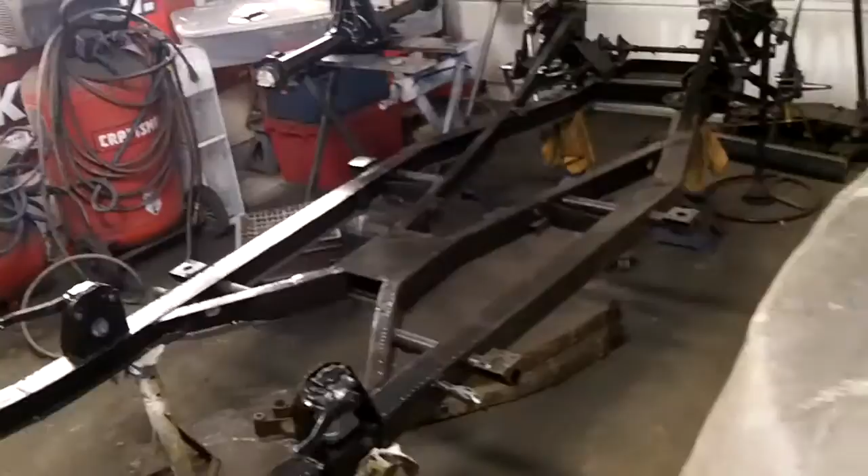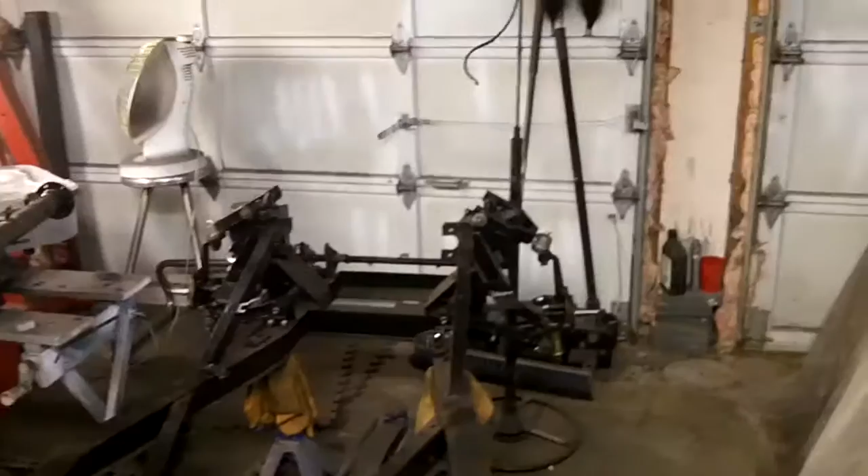As you can see, we got the chassis uncovered again. It's very dusty. I've already dusted off the back end as best I could, but the front end needs a lot of work. That's what happens when you're in a closed environment over the winter with no doors open, so it gets pretty dusty in here. Anyway, we'll clean her up as best we can. It certainly doesn't look like it's been freshly painted anymore, but that's okay.

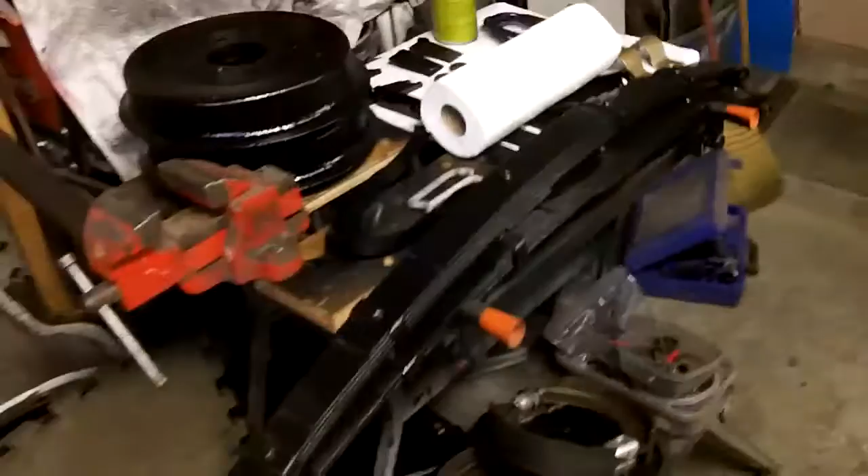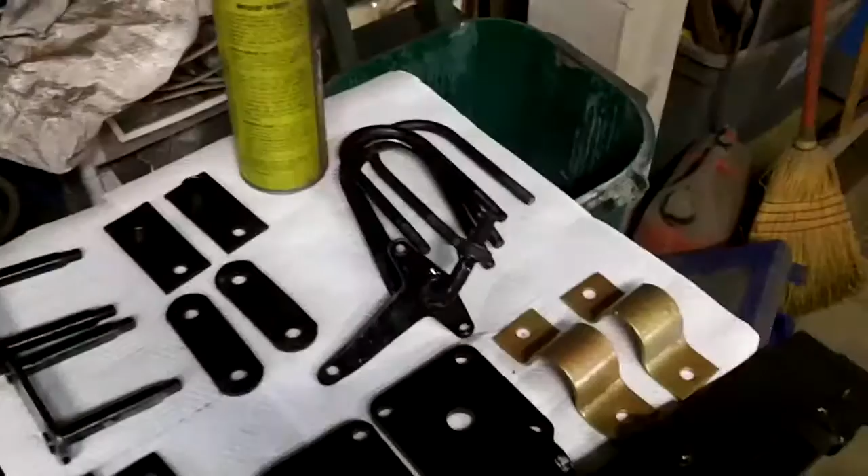We're going to attempt to reassemble the rear of the car today. We'll try to get as far as we can. I have all of the freshly cleaned components over here, representing more than a couple weeks of work. All those bits are clean, the springs are ready to go, brake back plates are ready to go, diff cover is ready to go. I've got the rear axle ready to go too. I think we're in pretty good shape to start reassembling, and we'll probably get to it shortly.

I've dug my manuals out, and I think what I'm going to do is go through a really brief intro on these manuals and how I use them in the restoration of this car. I did something similar when I had the TR6 out, showing all the manuals I had for that and what was important to have. I'll show you a quick overview of what I've got here working out in the garage. Alright guys, see you in a bit.

Alright guys, quick overview of what I'm using as far as manuals out in the garage to reassemble this car. The first manual I have is the service instruction manual from Standard Triumph. This is the third edition, one of the original books. It says for Triumph TR2, but it's actually got a supplement for TR3 in the back of the manual. I do have a newer printed copy of this same edition, third edition, 6th printing, but obviously that one's a lot newer, not being hardcover, and being a more modern publication.

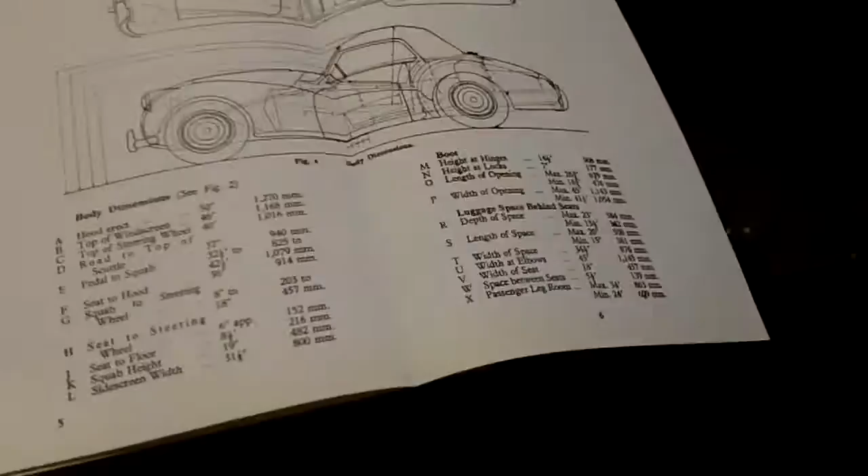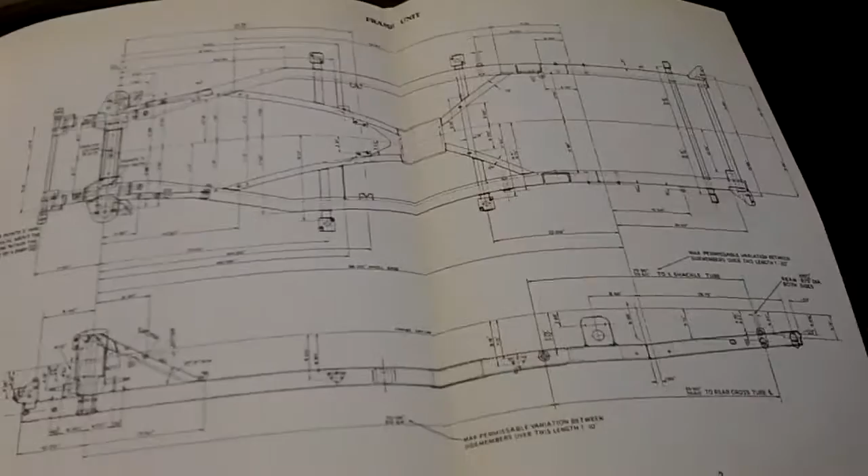The cool thing about the older books, and I actually have a mint condition one that doesn't make it out to the garage, is they've got these really cool flip-out pages in here. Here's the general data page, for example. I'm not sure how well you'll be able to see this, but those are kind of cool. I really enjoy these, and I was actually thinking of framing a couple of the ones out of the mint condition book, because I think they're pretty cool. Here's another one on the frame unit, with pretty detailed information to check your frame. I thought those would be kind of cool framed.

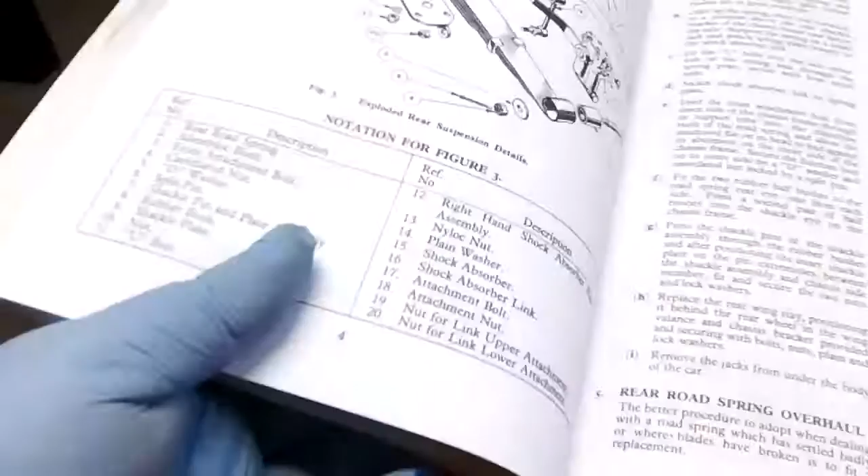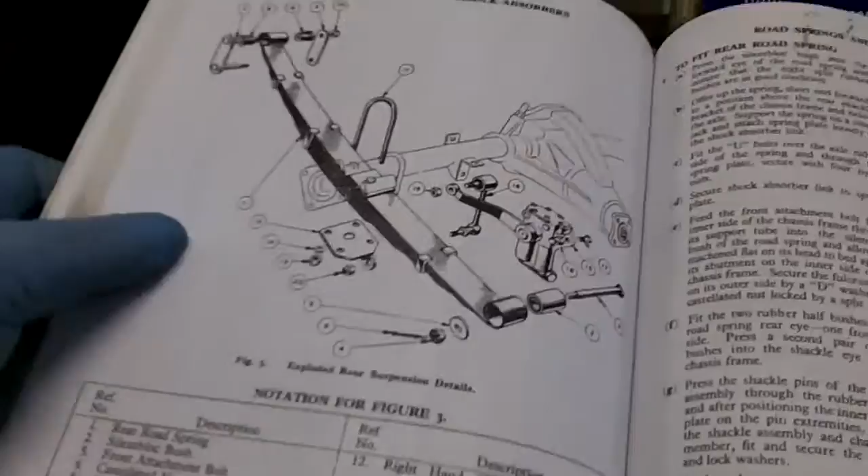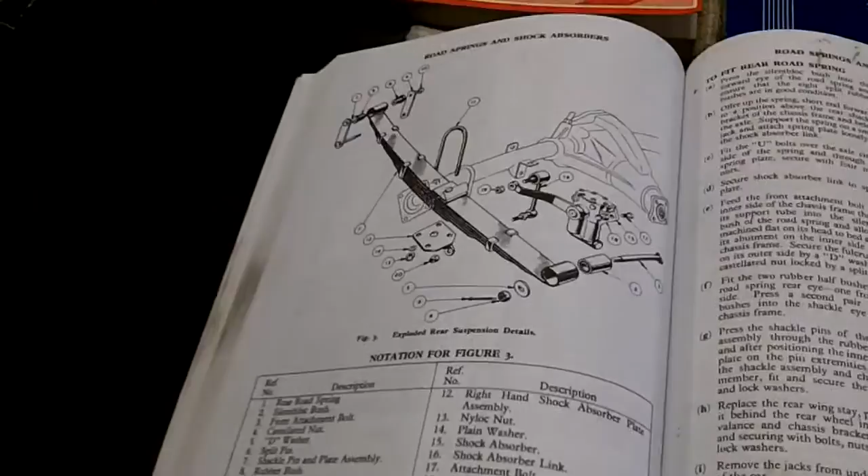So this is a good book that covers pretty much everything you need to know about working on a Triumph TR2 to TR3B. There are some minor changes along the way, but this will cover most things you'll come across. I've just got this page open to the road springs and shock absorbers, because that's the part I'm going to be working on today. I wanted to give you a general overview of what these books look like and how descriptive they are. These books make this car extremely easy to work on, especially with the availability of parts. The parts availability for these cars is phenomenal, you can almost get every single nut and bolt, with very few exceptions that are NLA. So I use that book basically to figure out what to do on this car.

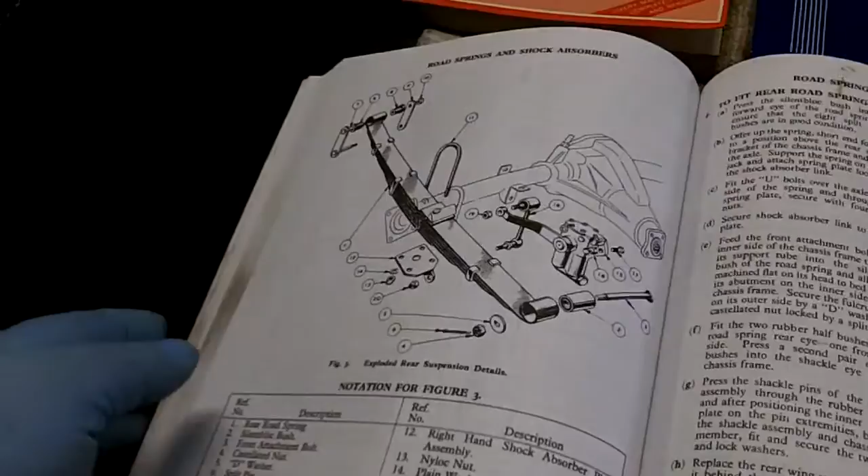I also use the Haynes manual. If the language in the Standard Triumph book gets a little over the top, sometimes it's difficult to understand the British terminology, and the Haynes manual can help you out in that regard.

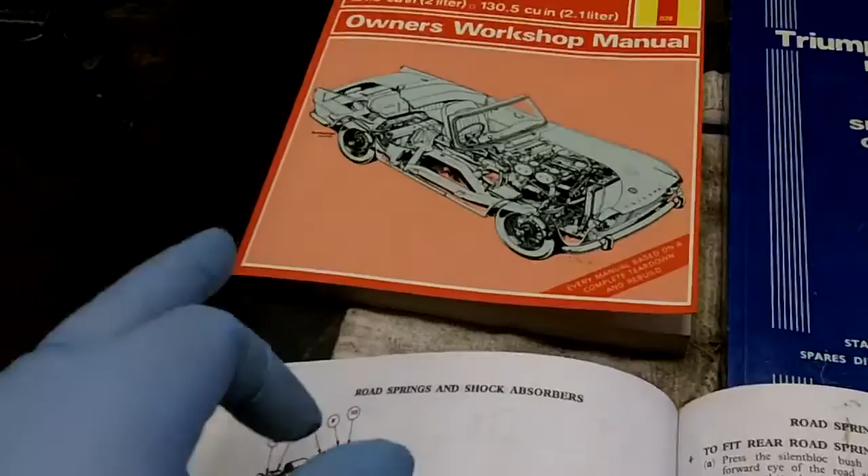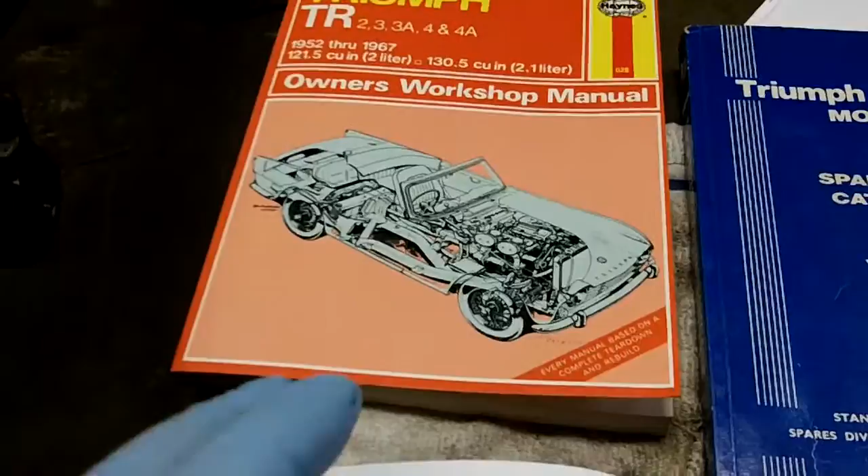This one covers a lot more models from the TR2 to the TR4A, so it's a little less specific when it comes to the TR2, 3A, 3B.

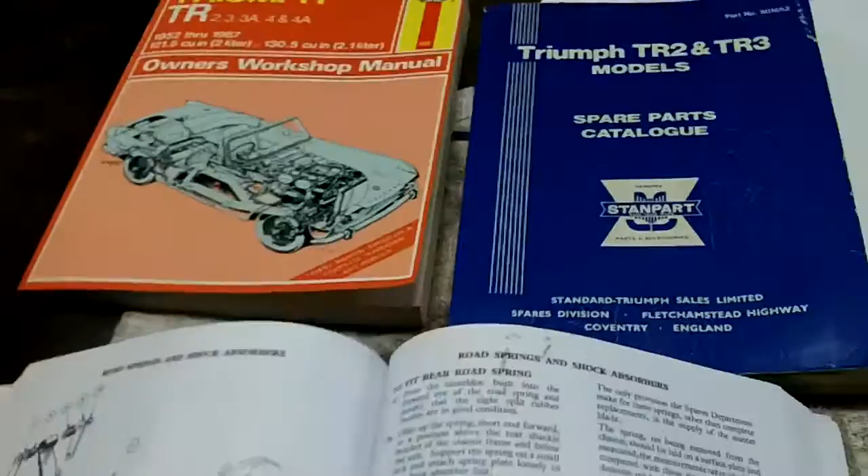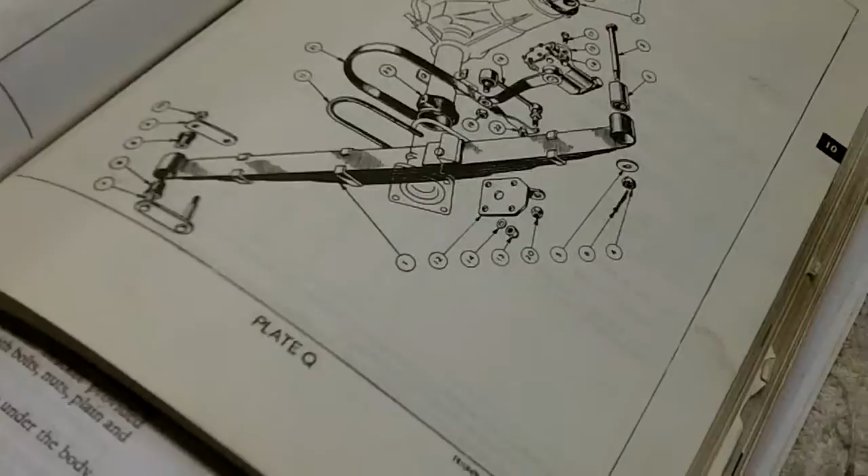Because there's more information in there than what you require just for working on the Triumph TR3, the other book I use out here is the spare parts catalog, and this comes in handy when you're trying to figure out what fasteners to use or the order of assembly, that kind of thing. It's got excellent diagrams, and I think the diagrams from the manual are borrowed from the spare parts catalog, or vice versa. So you've got a pretty good idea of the rear suspension setup there by looking at this plate.

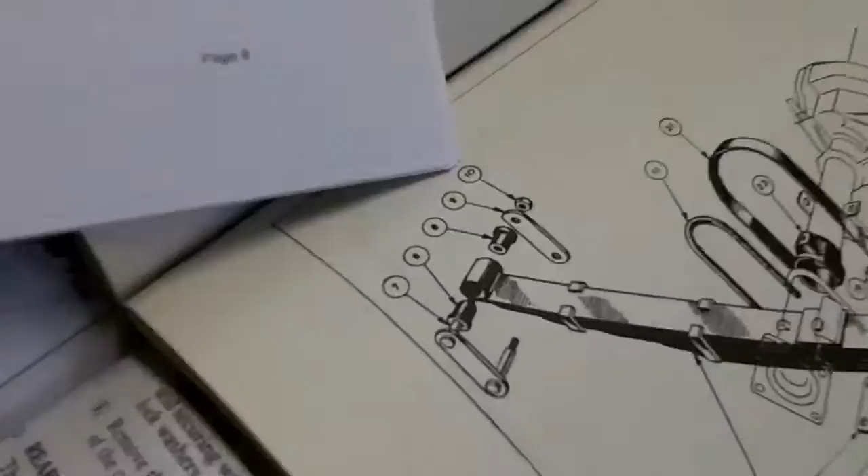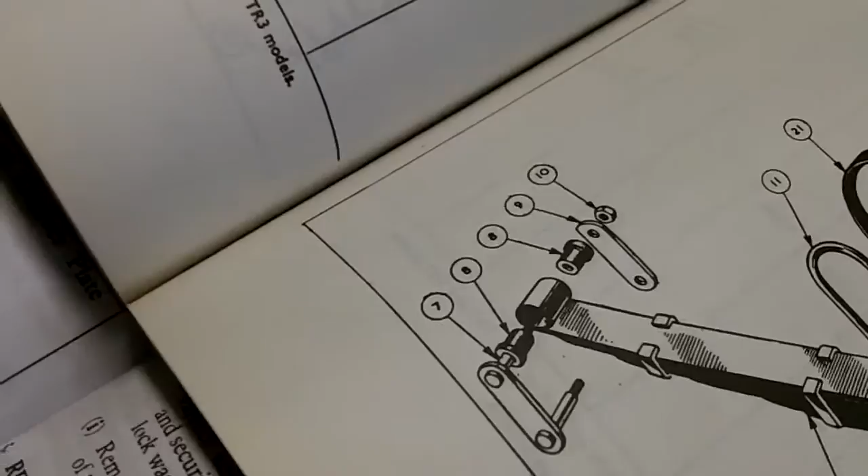It also has a reference to all the part numbers, so if I'm looking, for instance, what nut to use, number 10, I'm trying to figure out what nut I'm supposed to use on the back of my shackle plate. I'm not sure whether that's supposed to be a Nyloc nut or a hex nut or something other.

Now, when I worked on my 1960, just because you took it off the car in one way, shape, or form doesn't exactly mean that that's the right way. Since this was a race car, it had many different types of fasteners used, and for the most part none of them were really correct. They were fasteners that were grabbed that were easily at hand at the track, I would assume. So you can't necessarily go at what you take off the car as being correct.

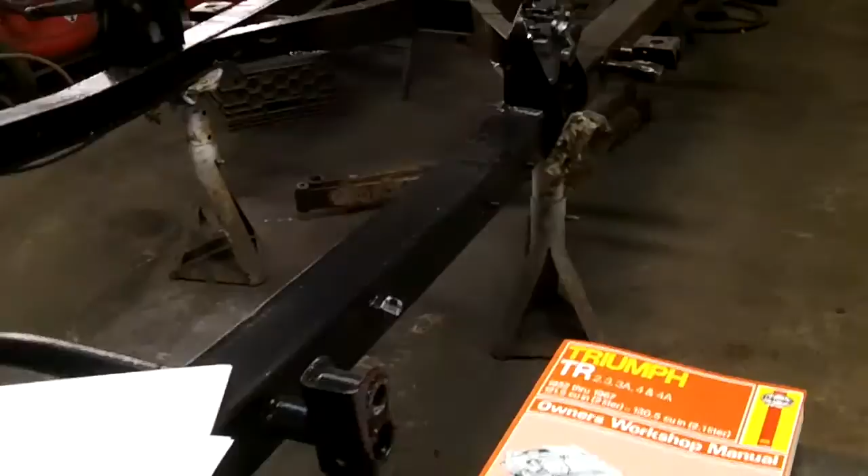Even on this car, I don't think it's really been apart too much, but it's always good to check that you've got the correct fasteners. Particularly if you're going for a concours restoration, you want to make sure you've got the correct fasteners. But just from a safety perspective, I think you want to make sure that you have the correct fasteners on there as well.

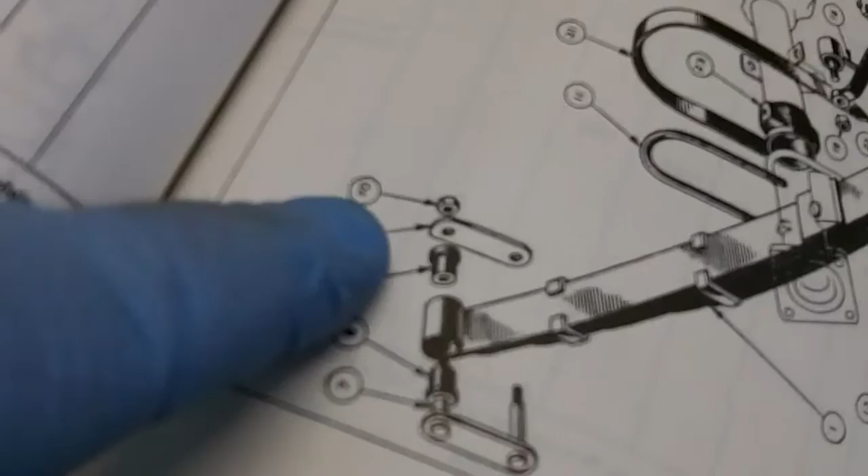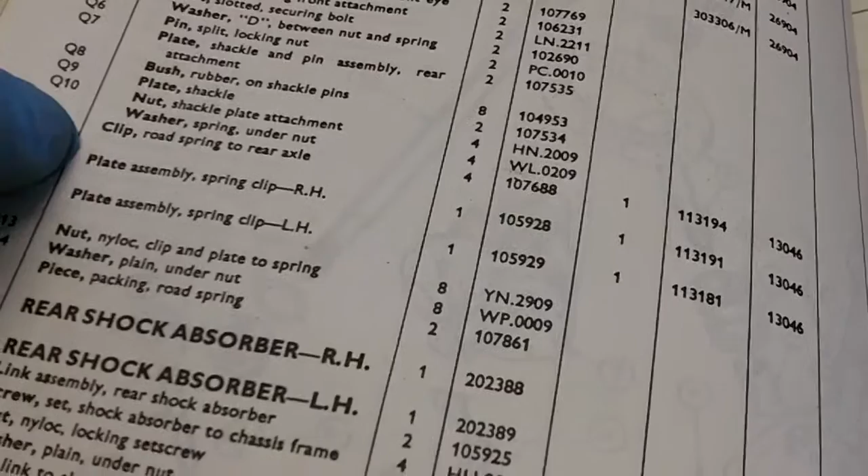So after I've got the number for the nut, in this case it's number 10, I can then look at the grid over here, which tells me that it's part number HN2009, nut shackle plate attachment. So now we need to look up the HN2009.

So I've just printed out this document, which is the hardware catalog for standard Triumph vehicles. This comes in handy to look up what that HN2009 is. Now this is kind of small print, but I can see in here, let me just take my glasses off because I can't read with my glasses on. So again, it's very small print, but HN2009 is listed there.

It's a 3/8 UNF, so it's fine thread, and it's 9/16 across the flat, so a 9/16 wrench. It's also got a nominal thickness of the nut as well.

So those are the documents I'm really using quite a bit to reference the reassembly of this car, just to verify that I've got the right fasteners and the right order of reassembly going on.

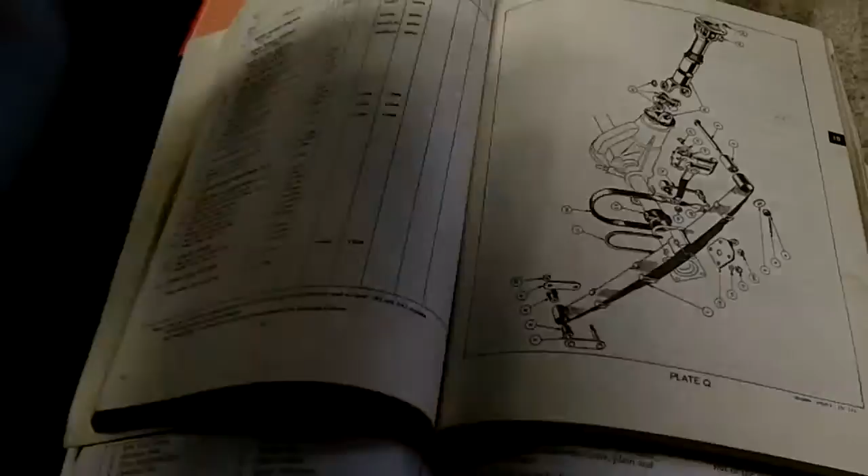That, and obviously what I do is I take a ton of pictures and videos while I'm out in the garage. I always have my iPad out here with me. I do have an internet signal in the garage, so in some cases I'll already have it set up, let me just put my password in here. So I'll be watching my videos out in the garage of how I disassembled the car.

That's always a good reference as well. And I always have a regular camera out here just to take some pictures to access for reference as well, if I just need some still photos.

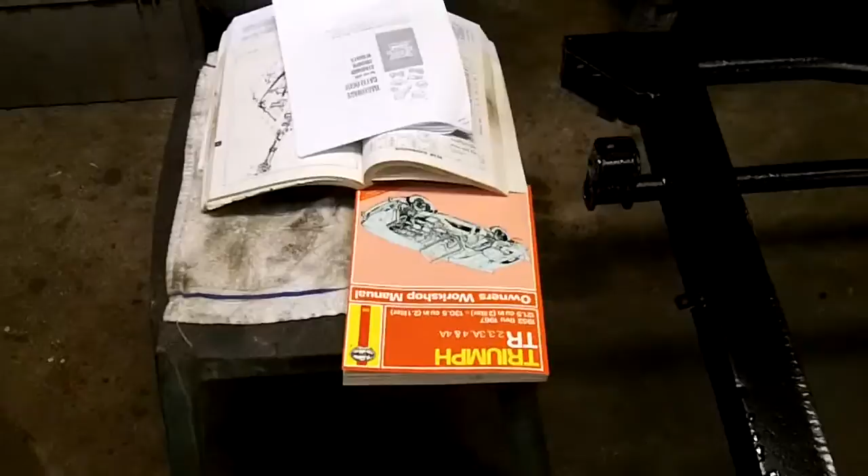So yeah, that's basically what I do out in the garage when I'm working on the car. It just helps me out quite a bit. My memory's not as good as it used to be, so manuals are always a good reference point, as well as the videos and still pictures.

So that's just a quick overview of what I use out in the garage.

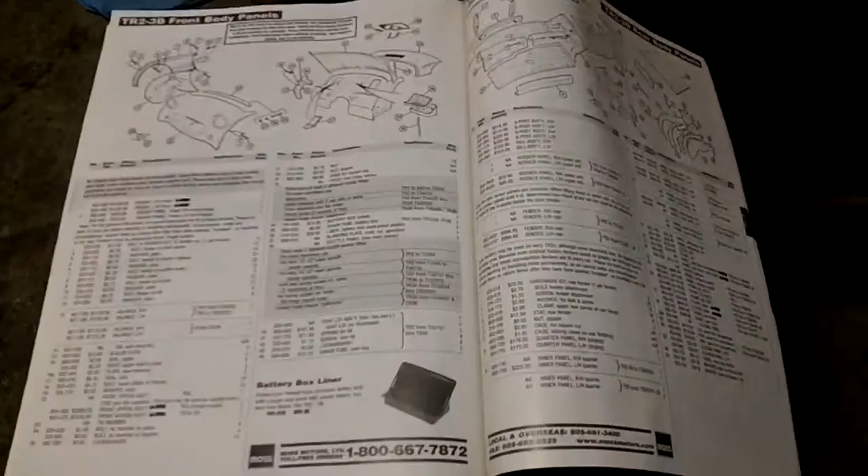Alright guys, I just popped into the house and grabbed a few more books that I wanted to show you. I don't necessarily always have them out in the garage, but I wanted to show them as a reference in addition to the other books I've just shown you.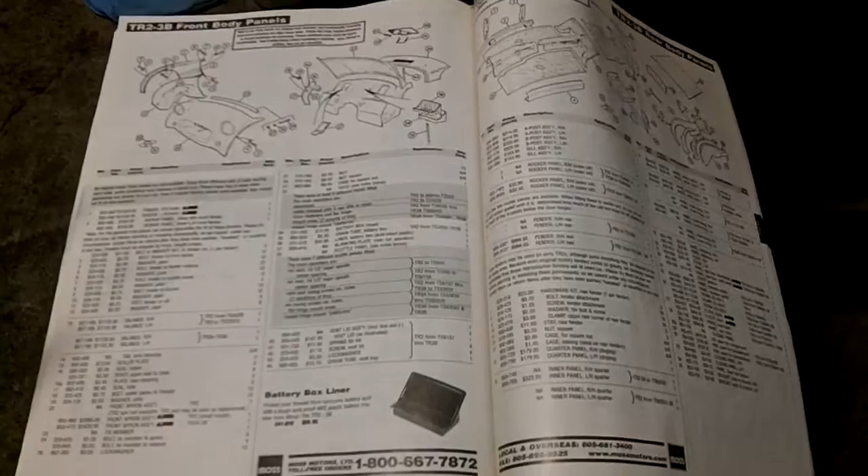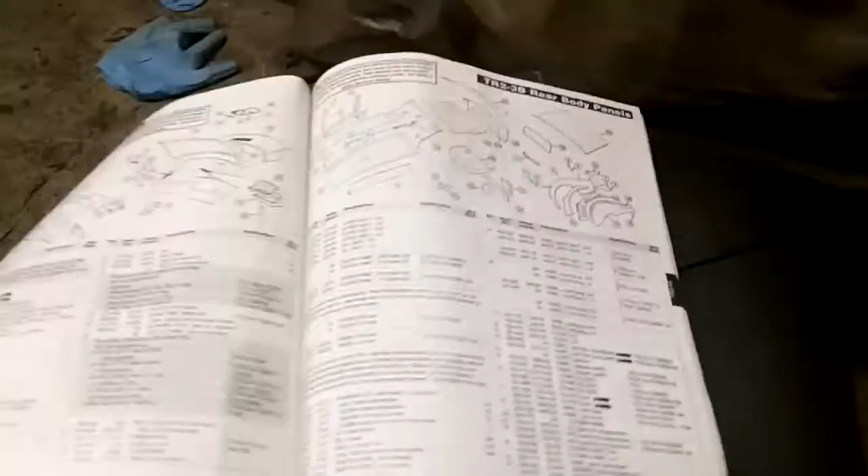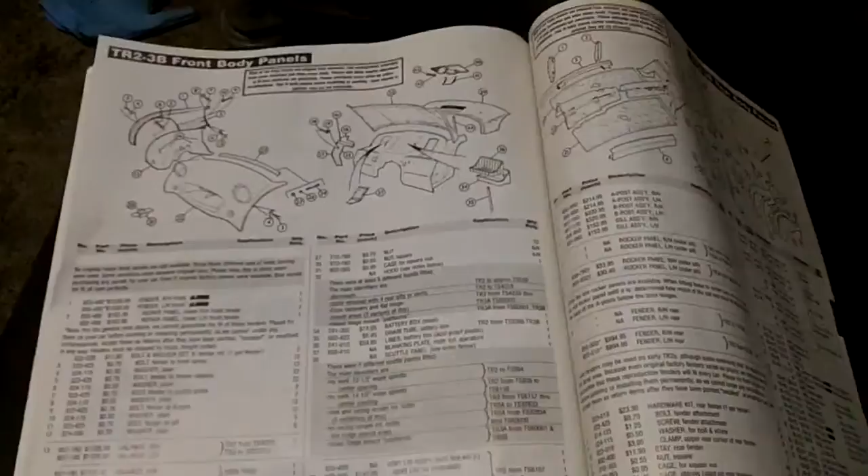So this is just a parts manual. This one happens to be from Moss Motors, a catalog for the TR2 to TR3B. The reason I wanted to show it to you, and why I find it valuable, is it still has diagrams pretty much the same as what you see in the spare parts catalog manuals. However, what I find valuable in these catalogs is they also indicate, in a lot of cases, changeover numbers by year or by commission number.

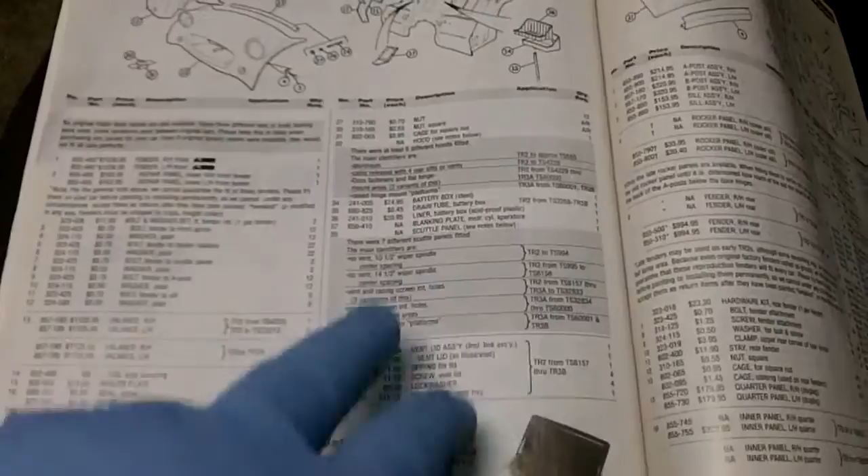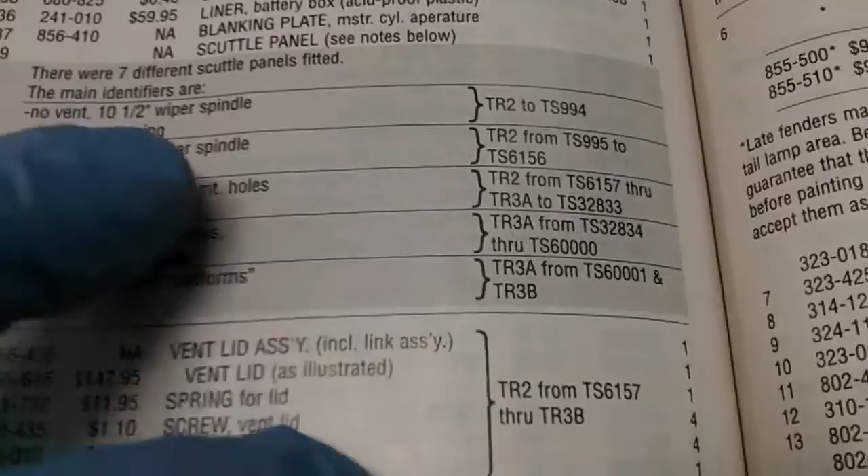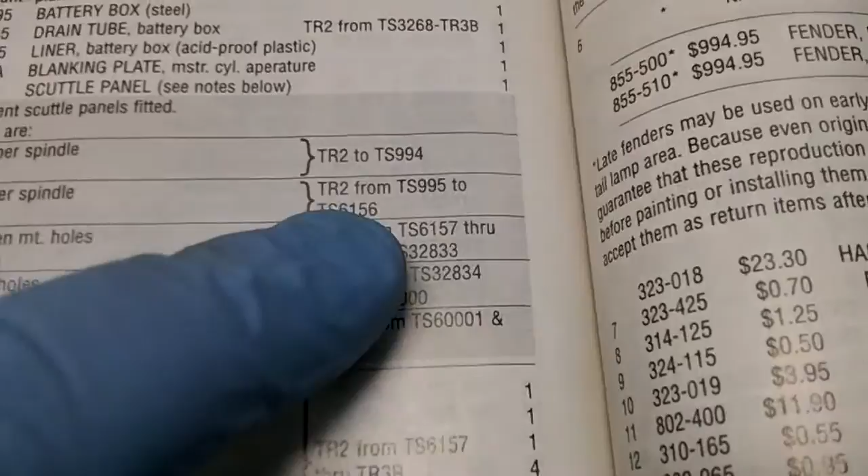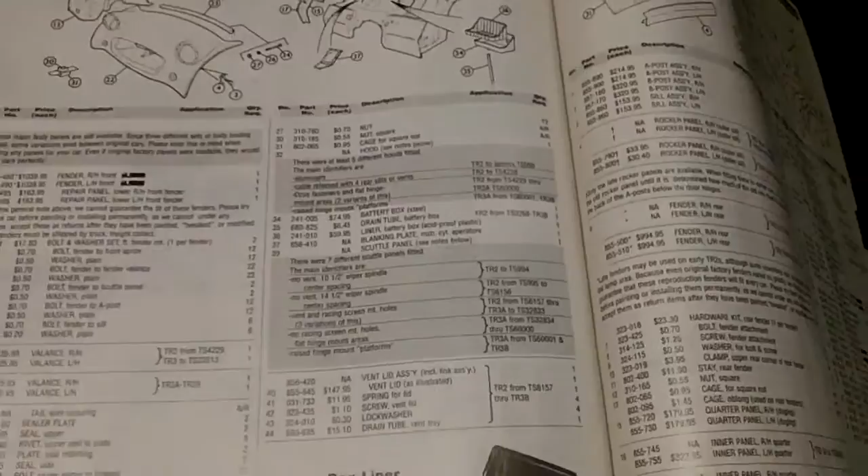So if you're looking for a specific part, you might be able to see this, this is the bonnet, for instance, and scuttle panels, and it's got change numbers by commission number. You see here TR2 to TS number 994, TR2 from TS 995 to TS 6156, and so on. This helps you identify what parts you need by year, because there are certain changes that somebody not really familiar with these cars may not notice. But there are definitely changes you need to be aware of when ordering parts if you're looking to keep the car original looking.

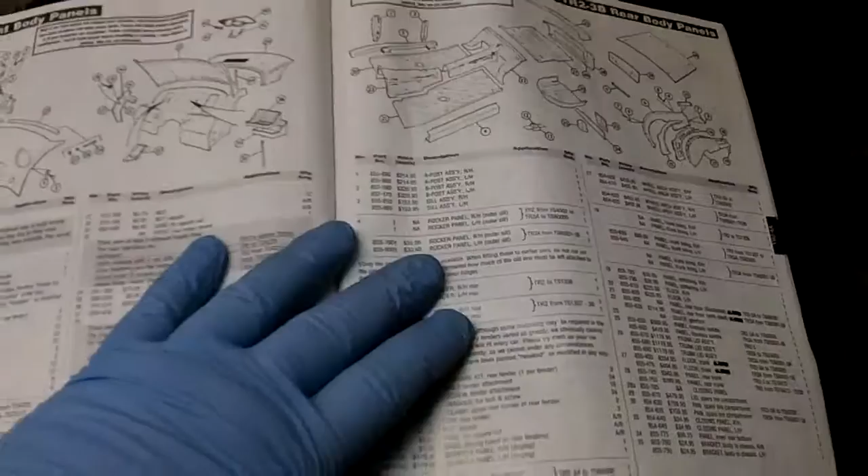So I just wanted to bring that up. That's an important resource for us when we're ordering parts. Any of the major parts vendors usually have catalogs or online catalogs to look at for us to order parts from.

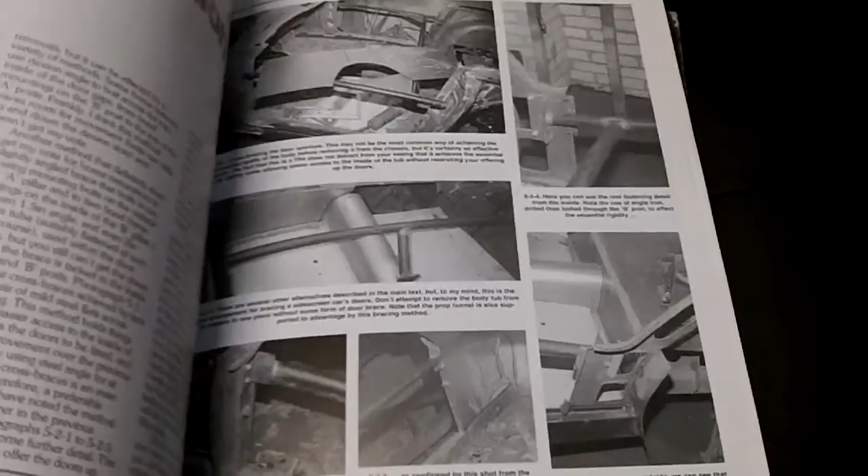One of the other good books, if you're doing a full body-off restoration or individual components, is this book by Roger Williams called How to Restore Triumph TR2, TR3, 3A. It's a good resource, got a lot of tips in here on upgrades or things maybe you should be looking at doing when you're restoring the car.

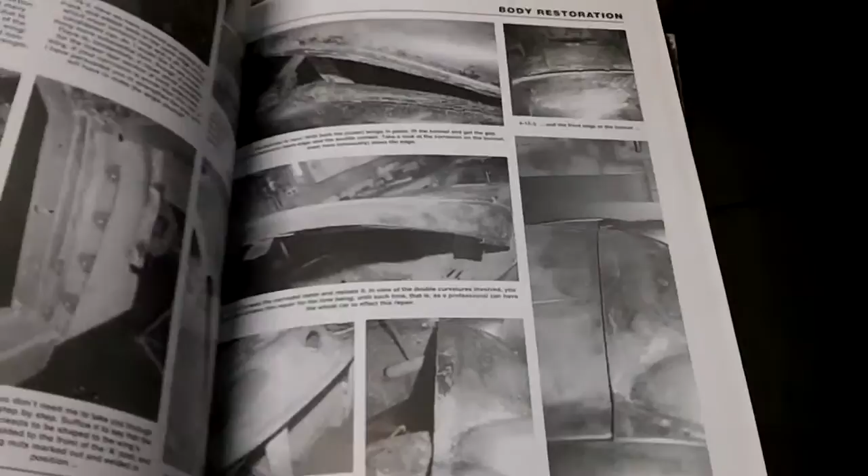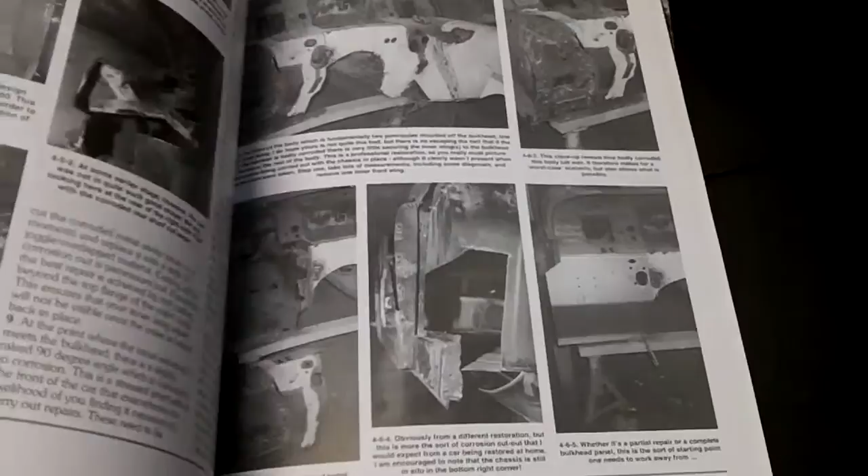It's a very good read if you're doing a full body-off restoration with lots of metal work, floor replacements, that kind of thing. It gives you good tips and pointers on how to do that. I believe there's a color version of this which would probably be better than the black and white. I just have the black and white version, and it's been a very good read.

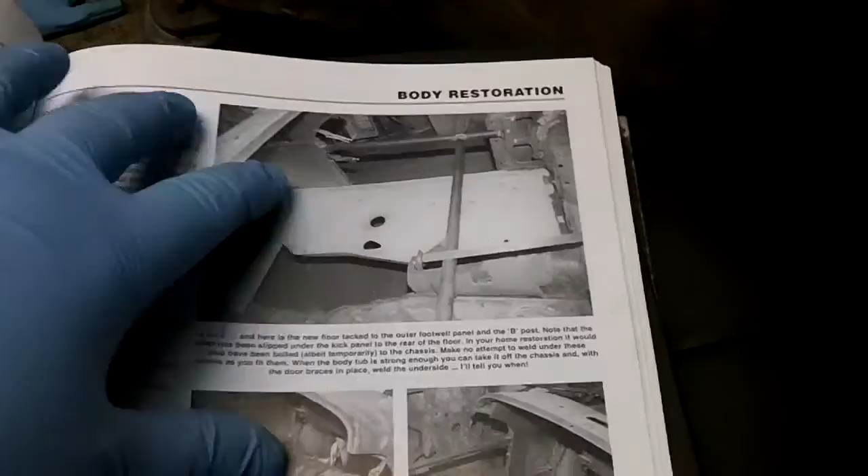Here's actually a section here on body restoration, showing how to do floor replacement and the proper structure reinforcement, that kind of thing, and how to do floor replacements properly. Anyway, that's a good book. If you're getting into a full restoration, it's a great book to have as a reference.

Again, I don't keep this out in the garage. It's something I just keep in the house, and I read it every now and again if I'm looking at a particular part on the car I'm looking at restoring. These are really good reference books just for if you're a concours restoration guy. They're really good because they have the histories of the cars, and they also talk about changes through the model years. This was the original book I bought.

This is the Original Triumph TR by Bill Piggott. Now this book actually has all of the Triumph TR models, not just the side screen models. Look at that, old Sports Car Illustrated for the TR10. Anyway, it does have a section on the TR2, 3, and 3A up to the 3B, which is a good read, but it's also got all of the other TR models, including some of the rarer models like the Triumph Italia.

So that was a very good read, but one more specific to the Triumph TR2, 3, and 3A is this In Detail book, again by Bill Piggott, and this really just concerns side screen cars. It's got a lot of great information, some really good reading. I'll show you the contents: background, prototypes, production, optional extras, side screen TR literature, side screens in competition, Le Mans cars, and so on.

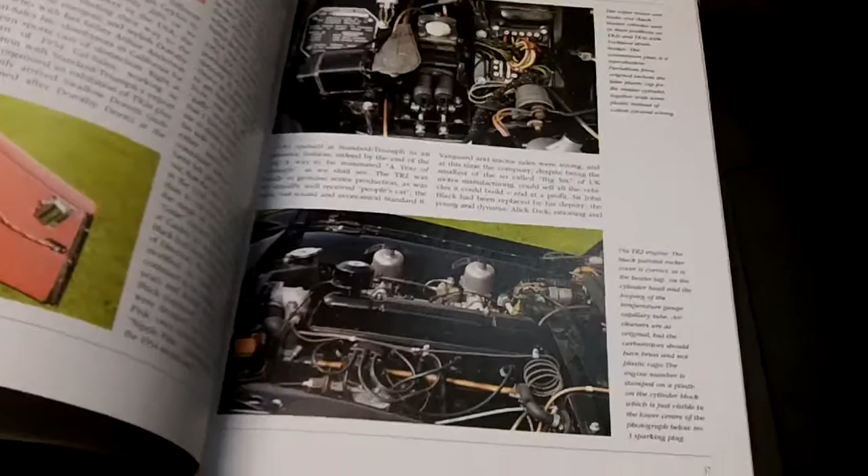So lots of great information in here, and again, it's really invaluable for doing period correct concours restoration. It's got a lot of great photos, tells you how things should be both in print and in photos. So it's a really interesting read. If you don't have this book, I recommend it.

I think these books are getting more difficult to find, particularly this one, the original Triumph TR, which is a little bit difficult to get. I've seen it going for astronomical prices on eBay. I don't believe it's in print anymore. So anyway, they're good reference books to have as well. They're a really good read, good coffee table books, and I don't keep these out in the garage either.

Just thought I'd let you know I've got those just for reference. So anyway, that's it for now, guys. We'll get back to working on the car.

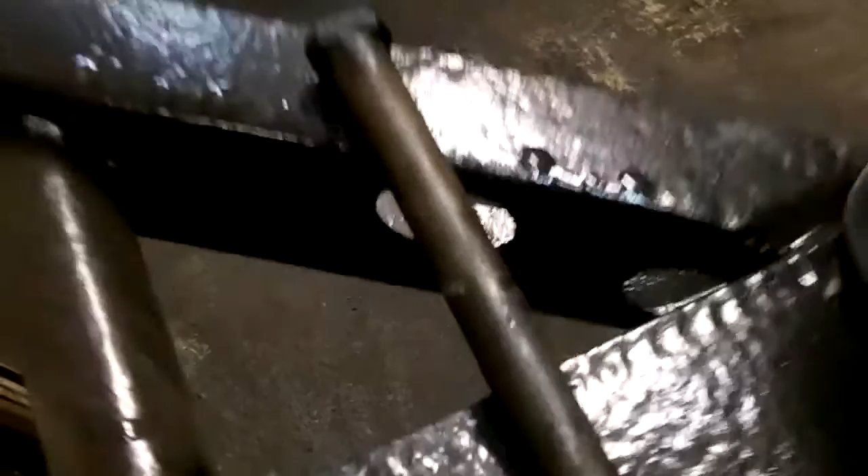So the first thing I'm going to do, guys, is I'm actually going to put a little anti-seize on these front spring pins. They can be a bitch to get out of the frame, they really rust in solid. So if I ever need to get these out in the future, the anti-seize I'm sure will help more than not having it on there. So we're going to do that to begin with on both sides.

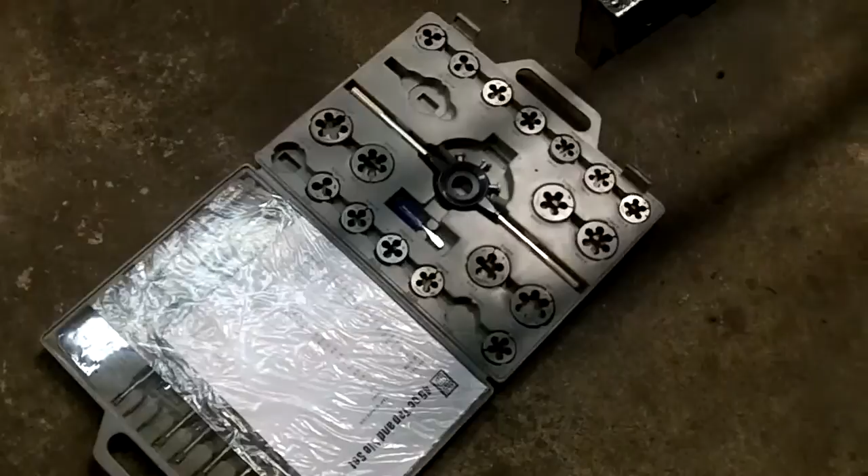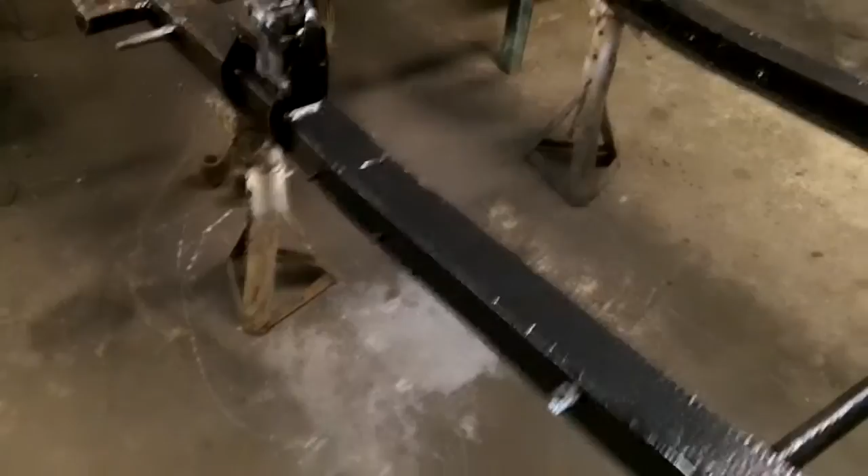Next thing I'm going to do, guys, is I've got the tap and die set out. I'm going to chase all those threads on the pins, and I've got some studs there on the frame for the axle buffer strap, so I'm going to chase all those threads. We'll do the same for these U-bolts as well, and we'll do the same for the shackle pins on the back. So we'll get those all cleaned up and ready to go.

Hey, good morning, guys, Tush coming at you. It's Sunday, March 22nd, just after 9 o'clock in the morning. Cold morning outside, -10, you wouldn't think it's now spring. I believe we have an overnight low tonight of -14, so it's getting even a little colder. So hopefully that will improve during the week.

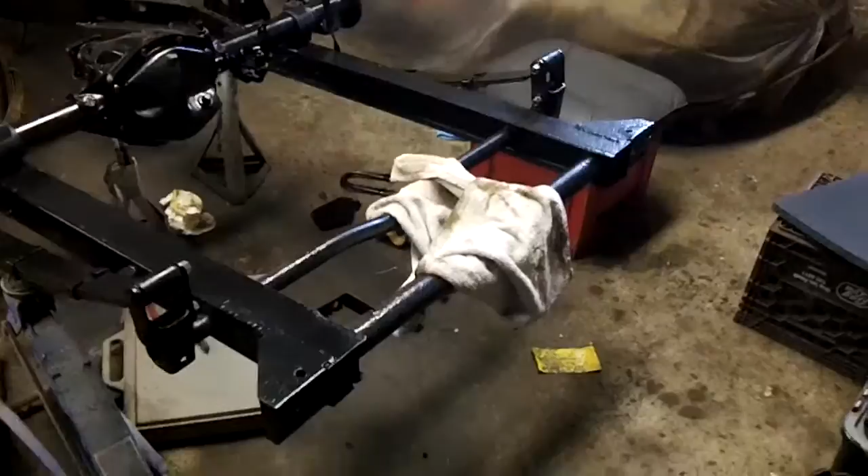Anyway, we're back out in the garage. We haven't been out here since last Sunday. Had a busy week at work, unfortunately, and wasn't able to get out here to tinker at all on the car, so we just left off where we were. We've put a few things together and stopped. If I recall, last Sunday wasn't a good garage day. Things just weren't sort of clicking and going into place as they should. So I was a little frustrated last Sunday and sort of just left it. And if you can see there, I just sort of dropped my tools and walked away. Sometimes it's better to do that than to be out here with your mind not on it.

So we're back on the car today, and the first thing we want to do is get these little rubber buffers secured to the axles. I do have the springs on the car loosely, they actually have to come off again at some point, not off entirely.

Usually what I do is remove the rear shackle plates to be able to lift the spring up to meet the plate that attaches the spring to the bottom of the axle. I'll show you that in a bit of a video when I get to that point, but it's important to know that you will have to move the spring upwards in order to get that bottom plate attached to the bottom of the spring. There's no other way to do it. You might be able to do it with the weight of the full body, engine and suspension on the car, but you definitely cannot do it as it is in this condition.

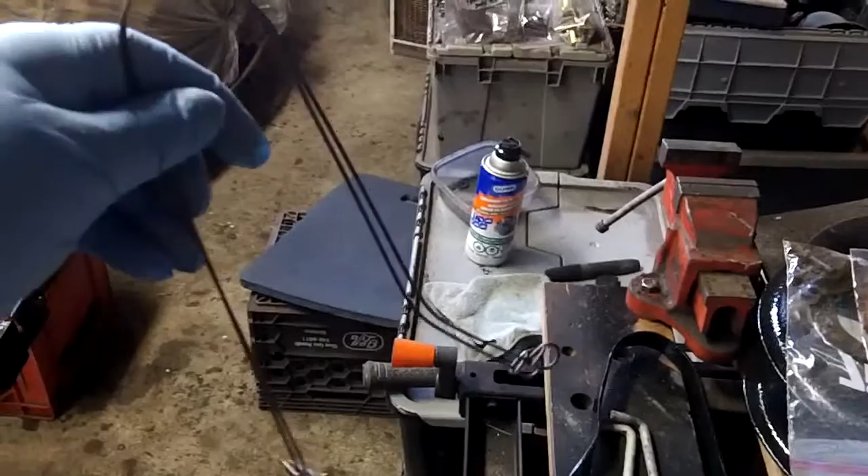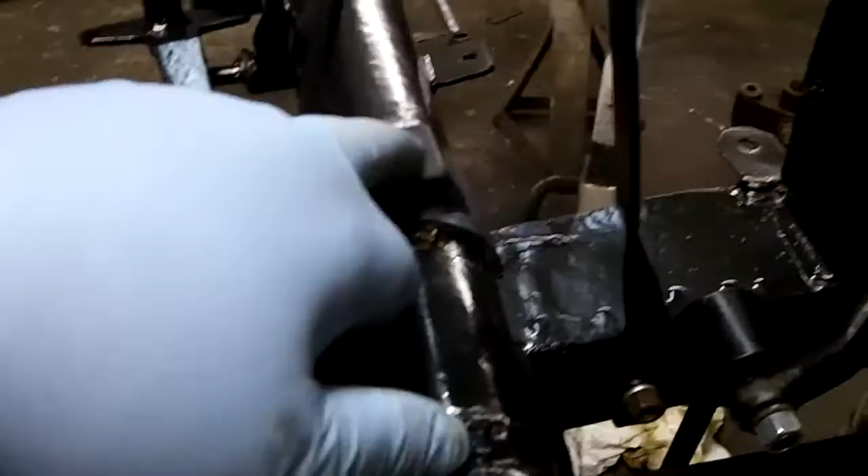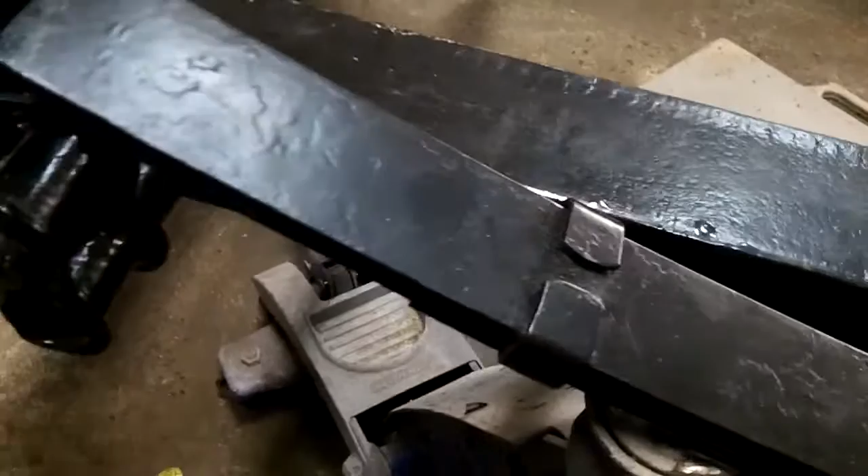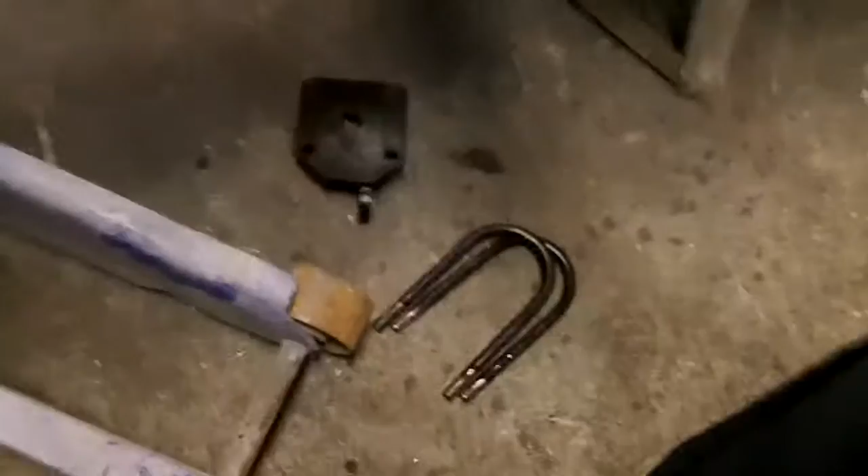Guys, so I've got the shock link in, just loosely attached. You've got to definitely put that in first. I've got the rubber buffer on, but I haven't wired it yet until I get the actual location of the axle set. I've removed the rear shackle pin, you can see it here, so I can lift this spring up so I can actually attach the bottom plate to the bottom of the axle. So I've got that sort of free floating. It's easy enough to push down and fit the shackle pin after you've got that plate attached. I find it easy enough either way — you can do it from the back or from the front, I just find it easier from the back personally. So anyway, what we're going to do is get that plate affixed to the bottom with those U-bolts, and we'll bring you back in a little bit.

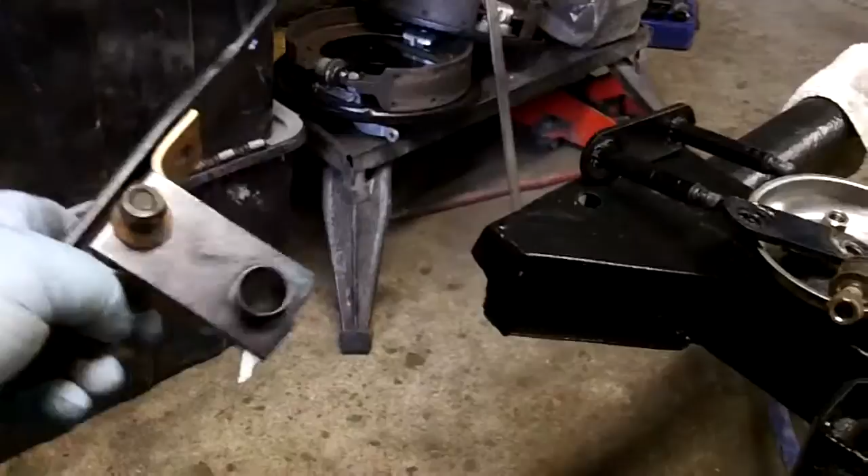Oh, one more thing before I go. I've actually got a rear sway bar on this car, so I've got the rear sway bar link assembled here. We're going to attach that — it actually feeds through two of the U-bolts, in addition to that bottom plate. So if you've got a sway bar, you'll need to fit this bracket as well.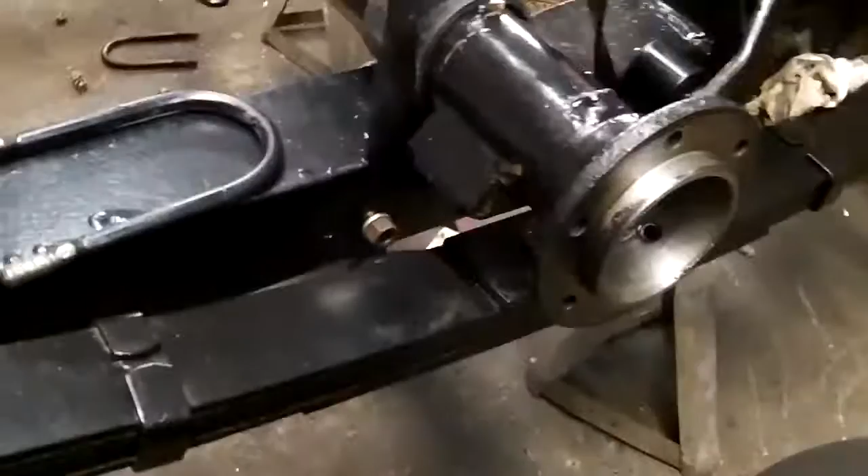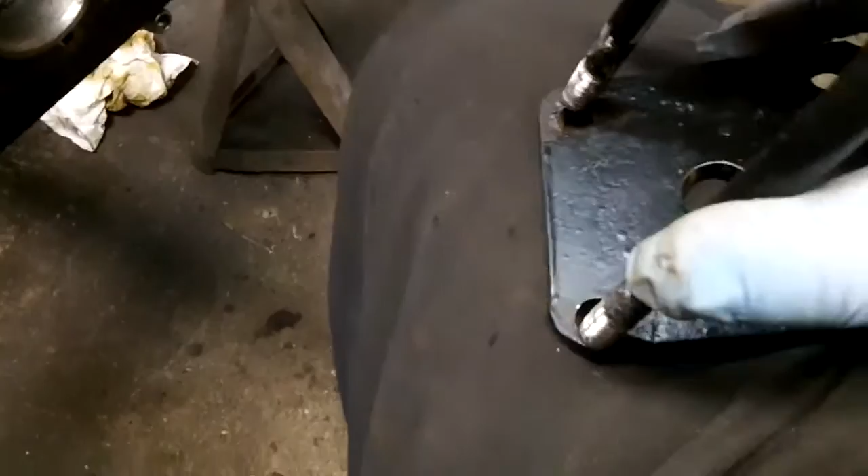Right, and guys, one other tip while I'm at it before I start: these U-bolts can be a bit of a bitch to get threaded through the bottom plate, as the bolts are usually a little wider than the actual plate holes themselves. They sort of want to spring out. So what I find helpful — you can see that they're slightly misaligned, they just won't go through cleanly — is I grab this wood clamp and use it to squeeze the top of the U-bolt together so I can fit it easily through the bottom plate. Just wanted to give you a quick tip on that.

I wasn't even focusing on the project, but there we go — that's kind of what I was talking about, using this wood clamp to compress those U-bolts enough to feed them through the bottom plates. Just wanted to give you a quick shot of that sort of redneck approach. It seems to work though, so I'll go with what works.

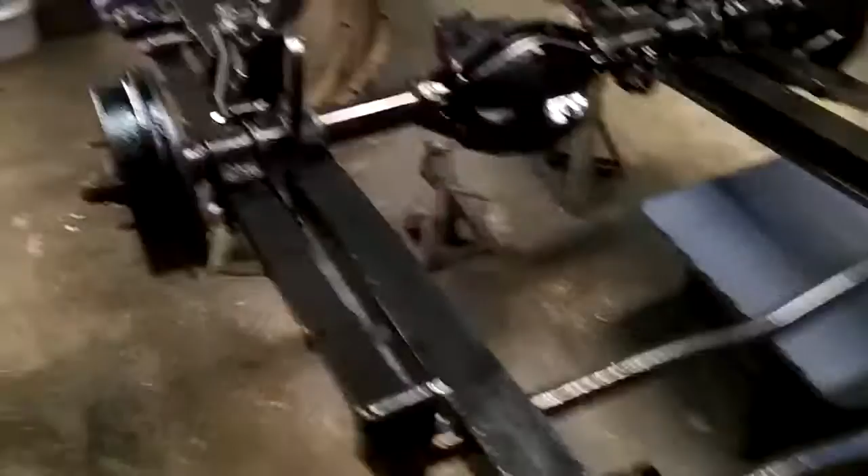So we've pretty much got everything back together as far as the rear end is concerned. We've got everything bolted up loosely. We haven't bent over the safety tabs yet on the rear axle or on the back plates, but everything is in. Shock links are connected, but just fastened loosely. Brake back plates are on, brakes are on, drums are on, buffers are on, rear shackles are on loosely, front pins are on, no cotter pins yet. So yeah, it's coming together, looking pretty good.

So I think what I'll do next is grab the emergency brake cables and stick those on the car, get them out of the bin, put some more bits back on the car. Then I think we'll move up to the front of the car and complete the passenger side front suspension and get that wrapped up, and then we'll be back to rolling. So that's it for now, guys. We'll come back — I'm not sure whether I'll upload this as it is right now, or maybe we'll come back with one more update for the night. We will see.